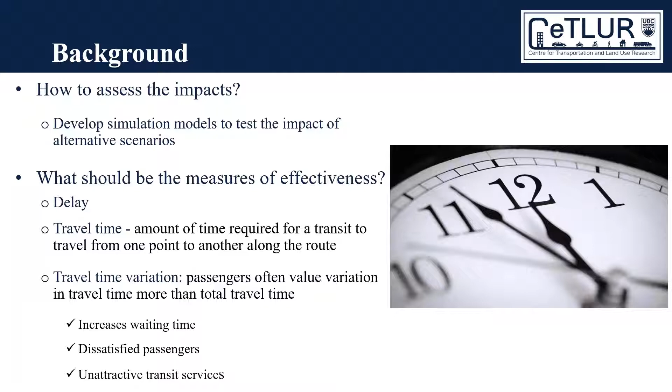For the study area, a busy congested corridor was chosen which runs through the city center in Kelowna, British Columbia, Canada. The corridor is Springfield Road, and the intersections range from the Gordon to Ziprick intersection. The length of the corridor is close to 5 kilometers.

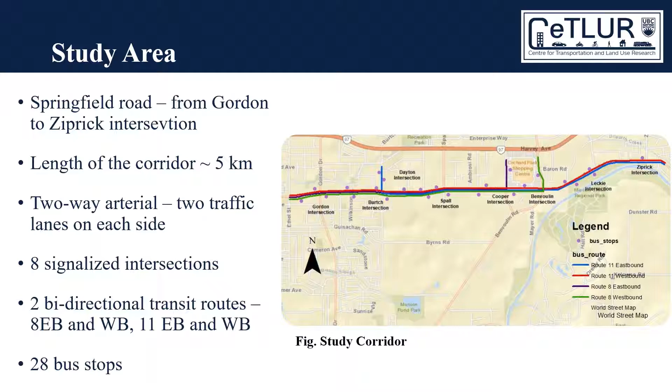This is a two-way arterial with 2 traffic lanes on each side. There are 8 vehicle-actuated signalized intersections, 2 bidirectional transit routes - number 8 eastbound and westbound, and number 11 eastbound and westbound - and there are 28 bus stops.

The network was coded using the VISSIM platform, version 11. The network coding involves the lane configuration, road grade, vehicle-actuated traffic signal timing, reduced speed areas, pedestrian crossing, transit routes, bus stop location, including the stop skipping probability at each stop for the transits, and passenger boarding and alighting.

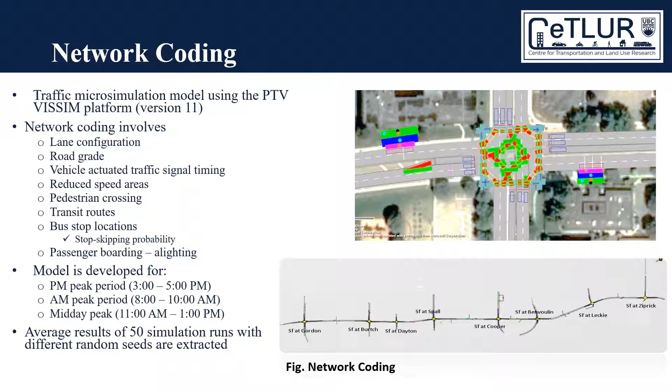All of the data were collected from the local government, City of Kelowna, and BC Transit. The model is developed for 3 peak periods: PM peak period 3 to 5 p.m., AM peak period 8 to 10, and midday 11 to 1 p.m. For each case, average results of 50 simulation runs with different random seeds are extracted.

The model is visually inspected and run. Every model was run over more than 100 times by differing the random seeds, with modified driving behavior parameters - Wiedemann 74 - the average standstill distance 2.1, additive part of safety distance 2 meters, and the multiple part of safety distance 1.8 meters.

After that, the models were also validated using real data collected from the field. The model was validated by queue-length and travel time of both car and transit. For queue-length validation, for example, we chose an intersection with 4 approaches.

Here, the values represent the simulated minus the field or observed, divided by the observed. We can see the error is close to 6 to 17%, which is reasonable.

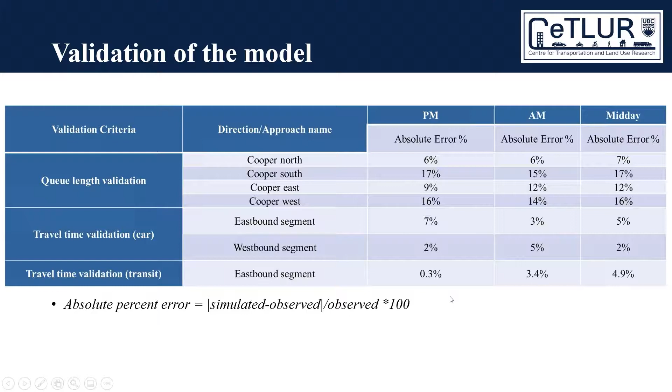4 scenarios were developed in the model. They are transit signal priority, queue-jump lane, exclusive transit lane, and a combination of transit signal priority and queue-jump lane.

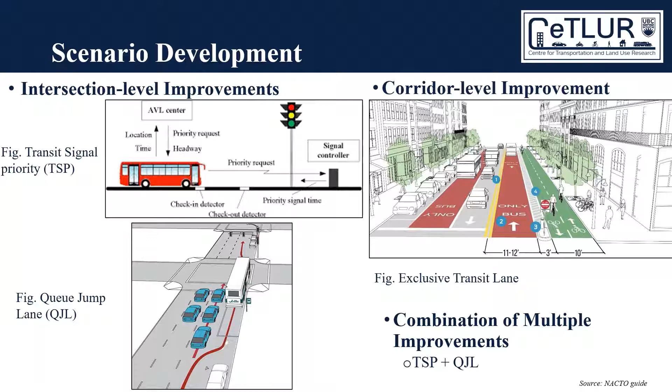Based on the travel time and delay results and visual inspection of the existing scenario, the new improvement scenarios were planned.

For example, transit signal priority was planned for the PM peak at the following intersection approaches: Cooper southbound approach, Burtch southbound and westbound approach, Gordon westbound approach. The reason behind this is we exhibit significant delay in these approaches, and others were also planned accordingly.

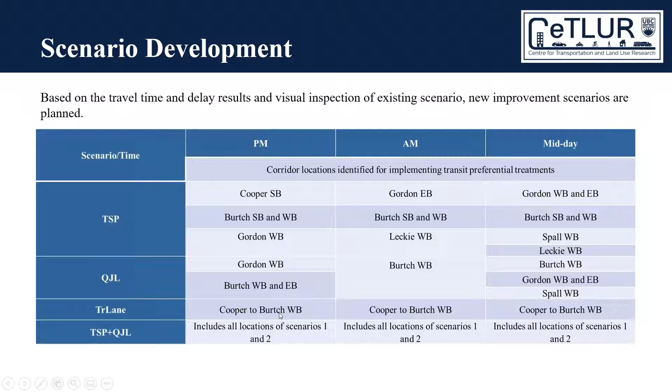After that, a random parameter regression model has been run. In order to capture the reliability or on-time performance of transit, model runtime and schedule runtime have been recorded in every segment between 2 consecutive bus stops in a given route.

From that, deviation between model runtime and schedule runtime has been recorded to address the on-time performance of transit. So here, reliability refers to the deviation of runtime between model and scheduled in a 2 consecutive bus stop segment.

All the remaining alternative transit preferential treatments showed a negative relationship, indicating an increase in reliability. However, except TSP plus QJL over the day and QJL during AM alternatives, all other treatments show heterogeneity by showing a higher standard deviation than the mean. With no heterogeneity, TSP plus QJL shows a significant negative relationship, implying it might cause consistent improvement in reliability over the day.

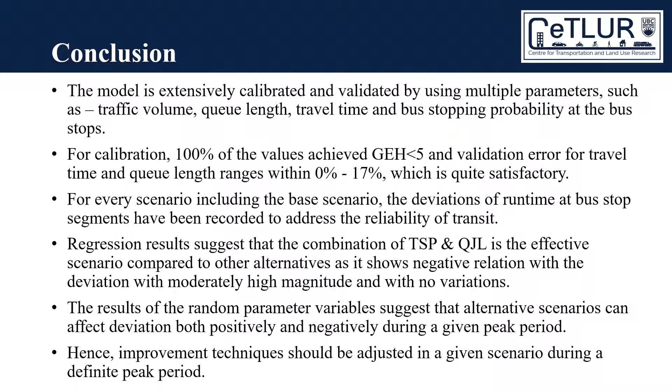Another important fact from the result of the random parameter regression model suggests that alternative scenarios can affect deviation both positively and negatively, and improvement techniques should be adjusted for a given scenario during a definite peak period.

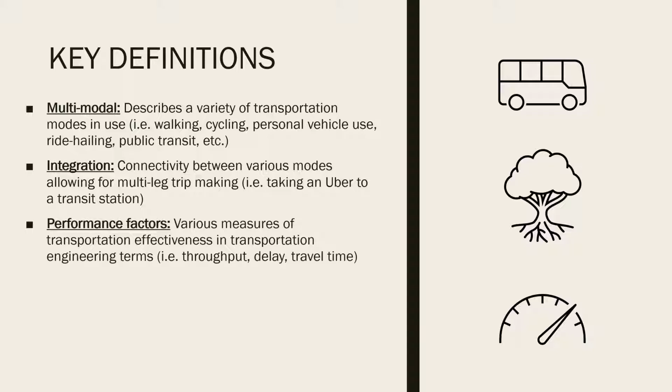Multimodal just means a variety of transportation modes: walking, cycling, personal vehicle use, ride hailing, public transit. Integration is the connection between these different modes, how we move from one mode to another in a mobility as a service system. Performance factors are how I will be measuring effectiveness in transportation engineering terms, such as throughput, delay, travel time.

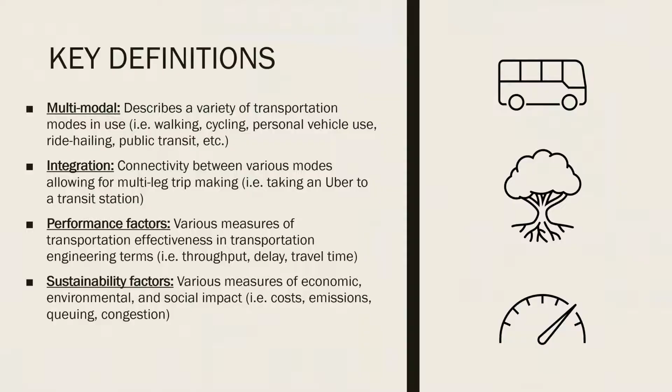We have many measures of economic, environmental, and social impacts. For this presentation, I'm going to be mainly focusing on the performance factors, since that was my main focus in using VISSIM. Here's another list of key concepts for MaaS.

It needs to be focused around the user—convenient, affordable, sustainable, multimodal. Information services are a big part in offering good mobility as a service systems, along with payment processing, and in a real world MaaS situation there would have to be a lot of public and private partnership.

So, problem statement: studies to date have not explored the hard performance measures of modally diverse networks in depth. There's still a lack of understanding as to how these various modes interact with each other and how they impact traffic performance.

I posited 3 research questions to achieve this objective. First, how is performance affected on a microscopic basis—these are effects observed by an individual person going through the network. Second, how is it affected on a network-wide basis—how does this affect the network as a whole? And third, how do these modes interact in terms of performance effects? That comes more into statistical modeling.

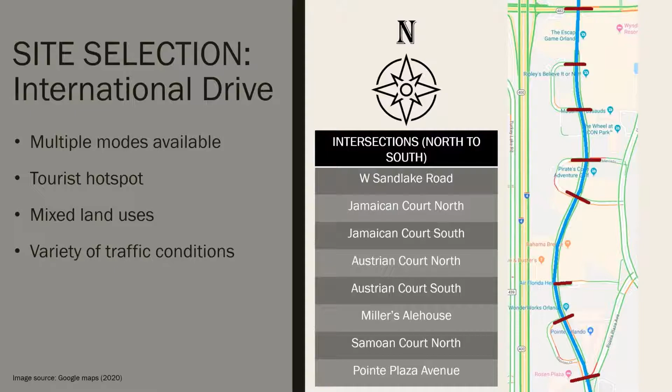The modeling stages went as such: starting with data collection, then geometry, signalization, vehicle compositions, vehicle inputs, driver behavior, transit inputs, pedestrian geometry, pedestrian signalization, and finally calibration.

I didn't want to go too in depth on the calibration process, but basically it was calibrated based on flow rates, queues, travel times, and general observations to make sure these matched up with real life. This was typically done by calibrating them to within a certain percentage of the real life observed values, and also through the Geoffrey E. Havers statistic, the GEH statistic, as mentioned in the previous presentation.

I'm going to go through my modal variables and how I selected these levels. First, demand. Demand represented the overall flow rate through all modes through the network. This was a combination of all the data, including demand in persons per hour for all modes, because when we compare performance effects, we need to compare apples to apples.

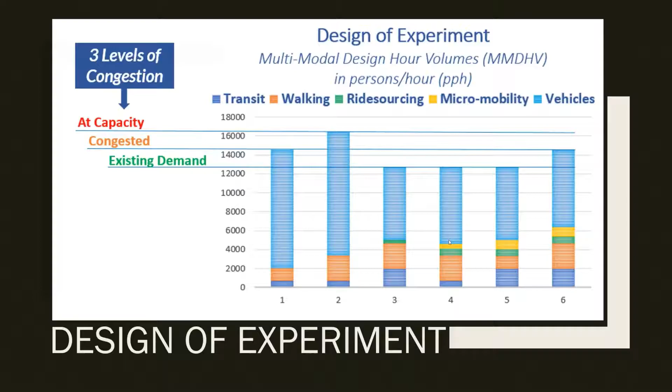Vehicular travel time, statistical modeling. The modeling process started off with data extraction from VISSIM from the calibrated model, organized into a data table, filtering of outliers via standard deviations, residual plots, and studentized residual distributions, stepwise regression and AICC comparisons to choose which models fit the best. I tried a couple alternative model types: linear regression, generalized linear, data transformed regressions. Finally, I picked the final model selection using statistical diagnostics such as ANOVA, lack of fit, and coefficient t-testing.

So what this translates to in plain English: micromobility reduces travel time, and higher levels of walking slightly increases it. Notably, the walking-micromobility interaction suggests that higher micromobility volumes add to walking delay. This is likely due to conflicts between pedestrians and cyclists. In how I modeled my network, pedestrians and cyclists were able to share the sidewalk and conflict and interact with each other as they would in real life.

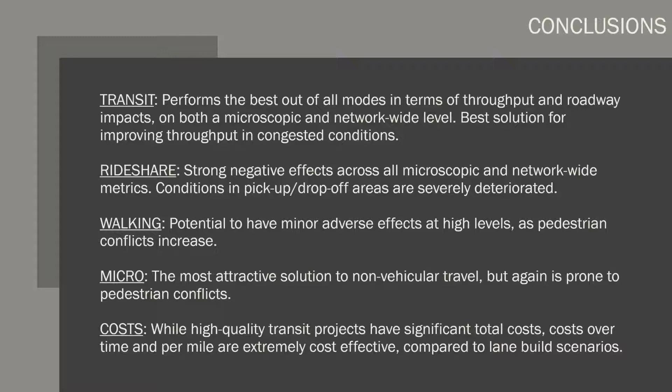Costs over time and per mile are extremely cost effective compared to lane build scenarios.

So I'm just going to finish this off with implications and future directions. Transportation design has recently been too tunneled on prioritizing vehicles, but the bottom line has always been moving people. The research demonstrated major insights towards more cost and performance efficient movement of people in terms of modal focus, design

considerations, and return on investment. The shift towards multimodalism cannot happen if lanes are being constantly expanded. We really need to focus more on designing around other modes, like with the laybys. We need to focus on preventing conflicts between pedestrians and cyclists, etc.

Networks need to be transit-oriented along congested corridors. This supports both the literature review and the performance results shown in this research.

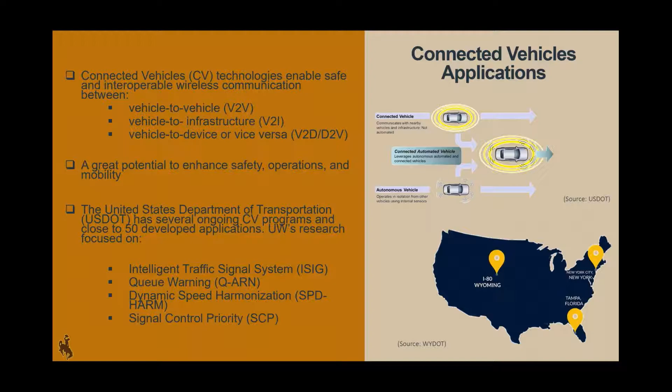Our research is focused on four applications: intelligent traffic signal systems, queue warning, dynamic speed harmonization, and signal control priority. This particular study is focused on signal control priority, usually known as transit signal priority.

It is a tool that makes the transit system more reliable using an operational strategy to aid the movement of transit vehicles or freight vehicles through signalized intersections.

It can be implemented as passive, active, and adaptive. Passive priority is based on already saved data of transit routes and ridership patterns, and it does not require any kind of detection. On the other side, the active and adaptive priority depends on detection and information exchanged between transit vehicles and traffic controllers.

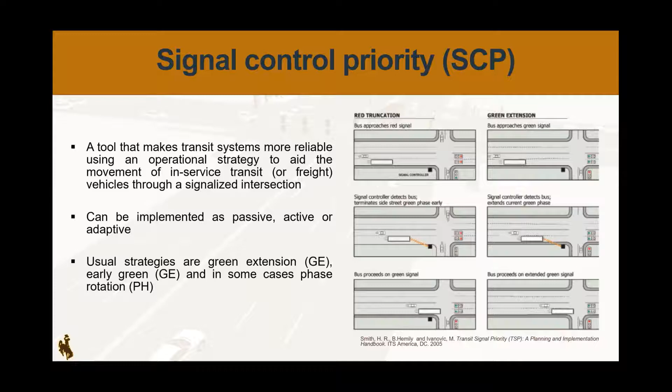Once signal control priority, or TSP, is granted, different strategies can be applied like green extension, early green, and in some cases phase rotation.

Functionality of this application directly depends on the communication between transit vehicles and traffic controllers. So far, this communication was achieved through traditional detectors or later through a global positioning system. Even though these systems ensure the call of TSP, they show some kind of imperfections, which can be solved with CV technology because it can ensure transmission of accurate and very detailed information 10 times per second.

So signal control priority in a CV environment needs three components: a roadside unit installed on the traffic controller to be able to receive and broadcast messages, onboard equipment installed on the vehicles so these vehicles are able to communicate with each other and with the traffic controller, and information exchanged between these two, usually known as a basic safety message.

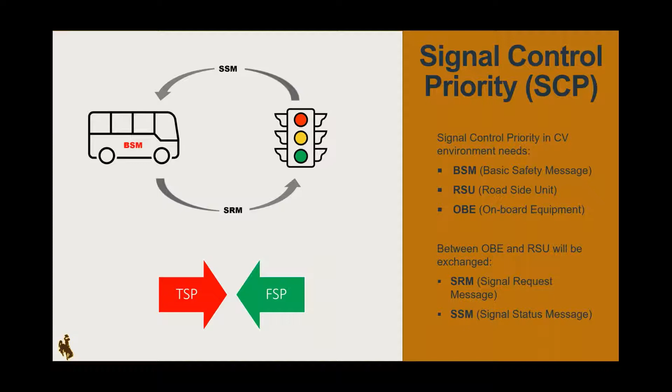The content of the basic safety message can differ for various applications, but in the case of signal control priority, the vehicle sends a signal request message while the controller answers with a signal status message. The same approach can be applied to freight vehicles, known as freight signal priority, or other solutions for transit like BRT.

The test case of this study is a multimodal corridor of 10 signalized intersections in Salt Lake City, Utah. Testing was performed for the afternoon peak hour from 4 to 6 p.m. It's important to mention that this corridor is served by a major bus route, Route 200, and future plans from the city include center running BRT for this corridor.

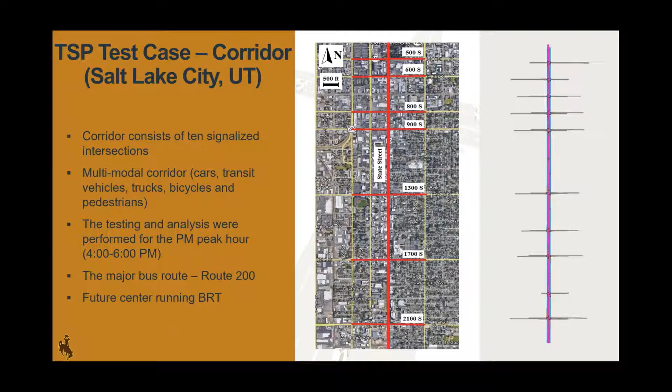The entire modeling as well as output evaluation were performed through VISSIM microsimulation coupled with ASC3 software in the loop controllers. The communication among vehicles and infrastructure, which includes sending a basic safety message to roadside units, was coded using Python programming language and embedded in the microsimulation, while signal control operations, priority, and controller logics were programmed directly in the controllers.

Here are some important settings that we did before finishing our models. It's important to change user-defined attributes that allow the model to convert VISSIM coordinates into world coordinates, meaning a vehicle with onboard equipment sends actual latitude and longitude coordinates directly to the controller.

Another setting is related to the external controller. Signal control priority logics are programmed directly in the controller. Since we had 10 intersections, it was necessary to do these settings for each of them. What's interesting is that the same settings done in simulation can be performed in the field.

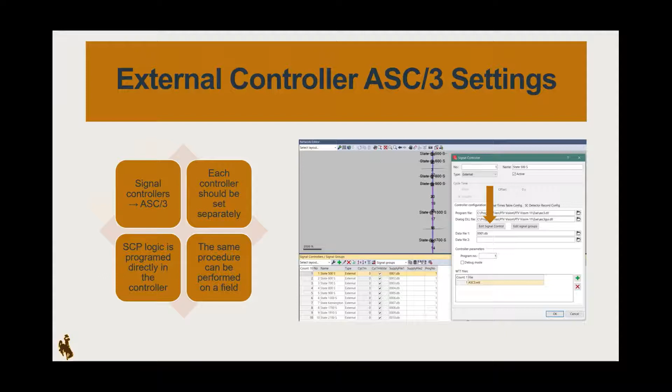The basic safety message exchange between onboard equipment and roadside units is coded in Python programming language, supported by functions from VISSIM's COM. In order to perform communication, as a first step it is necessary to define the detection range and what type of vehicles is eligible to transmit the information.

CV technology gives us flexibility to use any kind of vehicle attributes, such as speed, vehicle type, coordinates, or traffic condition, to define a detection range, which is completely different from the traditional detectors used earlier.

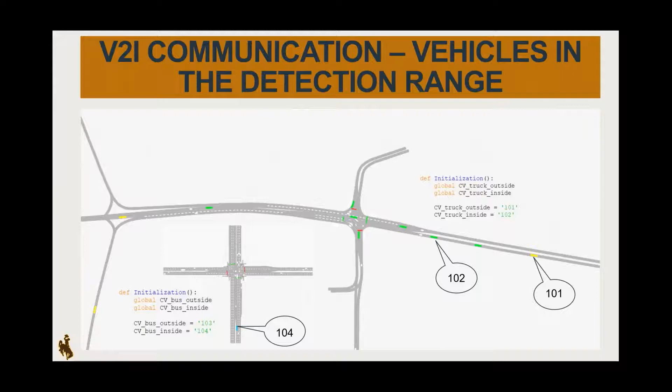The basic safety message contains the position of the vehicle besides other information. Distance is computed using a haversine formula, so the controller is updated with the vehicle position at each time step. Based on distance computation and the actual speed of the vehicle, the script was able to calculate the exact arrival time of the vehicle at each time step, which is transmitted to the roadside unit.

We applied two algorithms in our models. The first algorithm is for regular buses in a CV environment, and the second algorithm is applied only for CV-equipped buses. It checks the distance between a vehicle and the controller, the estimated arrival time of the vehicle to the intersection, and the traffic conditions, actually queue conditions in front of the vehicle.

Actually, COM functions give us options to make choices about the criteria that we want to include in our algorithm.

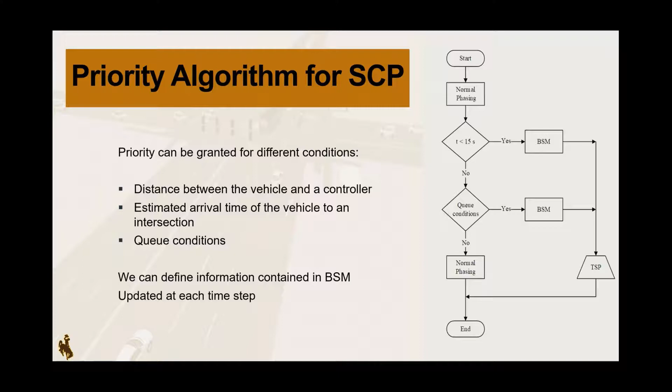Another algorithm, applied for the future running BRT, checks three different criteria and decides whether a bus needs TSP, and if yes, which level of priority. Inputs for the algorithm are the time the bus needs to reach an intersection, the number of passengers on board the bus, and whether the bus is behind schedule or not.

The threshold for bus occupancy was 20% of the vehicle occupancy, which is about 22 passengers on board. The lateness is computed according to dwell times in both directions and the free flow speed of the transit vehicles.

The roadside unit receives a basic safety message, and if any of the conditions are fulfilled, the controller will receive the transit signal priority request. The location from which a bus requests TSP depends on the speed and distance from the intersection. When a bus leaves the intersection, the priority request is terminated.

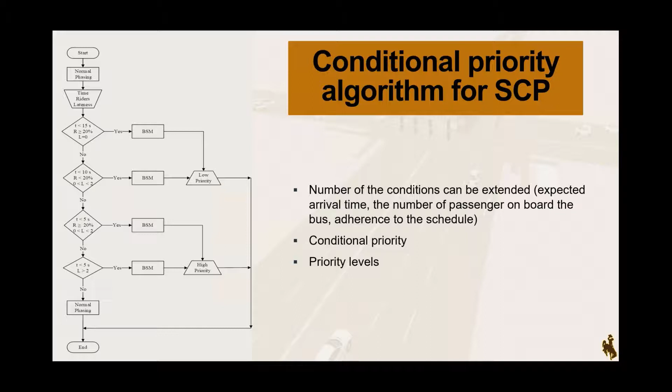Since we have different levels of priority, we have different strategies applied. If it's no priority, no strategy is applied. If it's low priority, green extensions and earlier green will be applied. In case of high priority, it will additionally be aided with phase rotation.

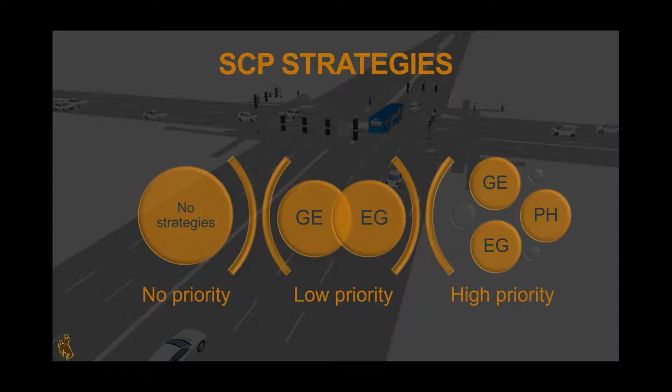Here we have a small video where we can see a vehicle which is out of range, shown in pink, and a couple seconds later it changes to blue color, meaning it's entering the detection range. On this controller app, we can see that it's granted transit signal priority, meaning it fulfilled all the conditions that the algorithm proposed.

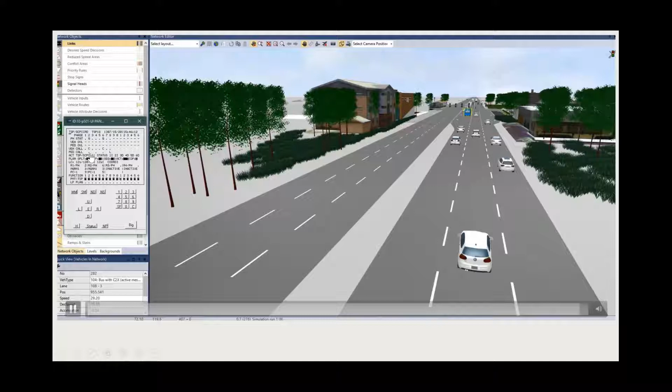Implementation of CV technologies in the TSP strategies would reduce delays. In our study, it showed that it's up to 33%, and it also increased speed of the CV equipped vehicles, up to 11%.

As expected, TSP has some negative effects on the traffic from the side streets. In this case, it is up to 7%, but it is still less than for conventional transit signal priority.

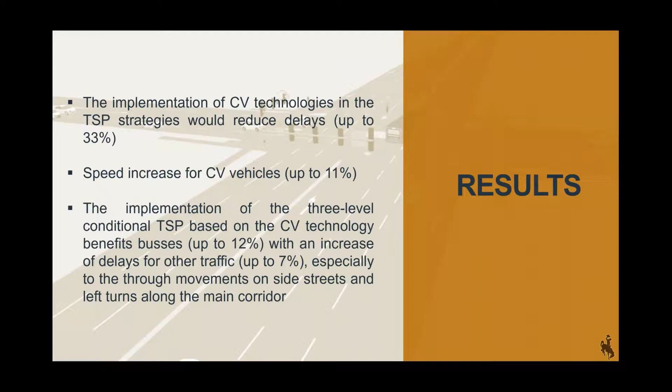So some brief conclusion: the information from CV equipped vehicles can be used to create different forms of conditional priority. Basic safety messages used in algorithms contain current queue conditions, vehicle speed, the distance between transit vehicles and intersections, the number of passengers on board, expected arrival time of the vehicle, and schedule adherence.

The algorithm is capable of introducing different levels of TSP while considering several criteria to grant the priority. Green extensions, early green, and phase rotations were strategies implemented in our models for different combinations.

Generally, from the 6 models or scenarios that we had, models where TSP strategy was coupled with CV technology showed a lot better performance. My name is Jahed.

I'm doing my PhD in civil engineering at Dalhousie University in Halifax, and I'm finishing it soon. Today I'll present on the development of a pedestrian microsimulation model accounting for social distancing strategy.

We did this work and submitted a paper on it to TRB, and we're waiting for the decision.

We've been in a pandemic for a year. We know there have been other pandemics in human history before, but this one is novel and catastrophic.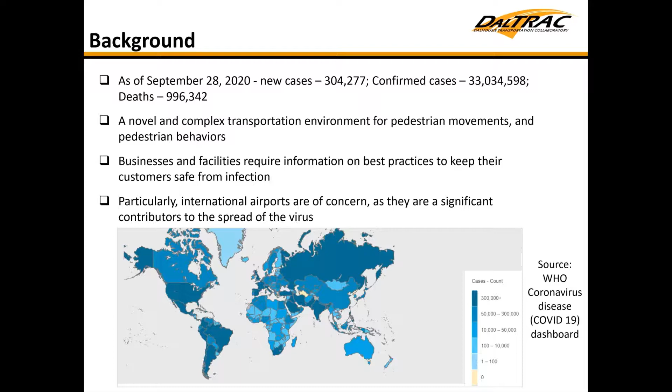Particularly, international airports are of concern because they are significant contributors to the spread of the virus. We have to keep in mind that there is already a shift in pedestrian behavior from a business-as-usual condition to pandemic conditions, so airport authorities should be, or probably are being, proactive in implementing strategies to keep pedestrians safe from infection.

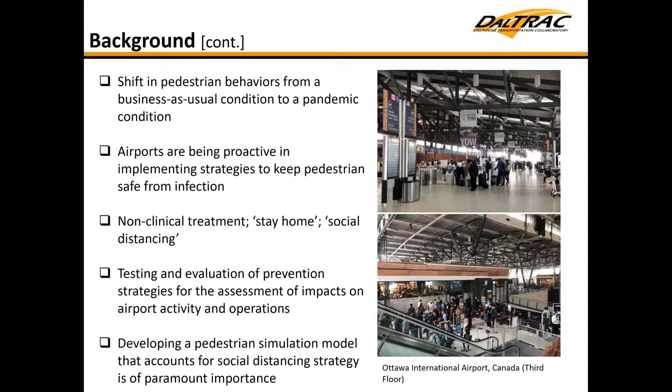But we need to evaluate and test those strategies before commencing, to assess the impacts on airport activity and operations. That's what motivated my study, which led to developing a pedestrian microsimulation model that accounts for social distancing strategy.

So my study develops a pedestrian microsimulation model that accounts for social distancing strategy for an international airport in Ottawa.

I used PTV VISSIM 11 and its add-on VisWalk to develop the model, and I utilized different commands within VisWalk to develop the model.

For example, you can use the area command in VisWalk to define the floor space, and there are other commands like obstacles to replicate kiosks and other places where pedestrians cannot move. Those kinds of obstacles you can define within the model.

And there is a direct command for escalators and stairs to include those within the simulation model. We chose the Ottawa International Airport third floor because that floor is directly connected to ground transportation, and there is high traffic activity on this floor due to arrival and departure activity.

To facilitate pedestrian movement within the simulation model, I used partial routing and static routing. Partial routing facilitates stopping at intermediate places between a pair of origin and destination, for example, waiting in...

...a spot like in front of the service counter for service in the airport. So you need to use partial routing to make a pedestrian wait in that area. And static routing basically defines the origin and destination.

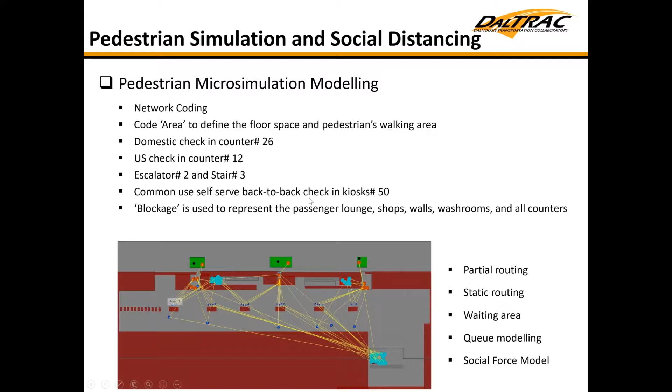So the social force model has several parameters to replicate pedestrian movement, like the X-Y directions, relaxation time, inertia, and responses to different events. You can model all those pedestrian behaviors using the parameters of the social force model.

I'm not going through all the parameters one by one, but I can discuss the parameters in detail later. Please feel free to contact me.

Now, the most challenging part is the calibration of the simulation model. As we will be using this simulation model for social distancing scenario analysis, we have to calibrate the parameter values of the social force model so that we can create a social distancing environment within the simulation model. I followed 3 steps to do the calibration: visual observation, sensitivity analysis, and parameter combinations.

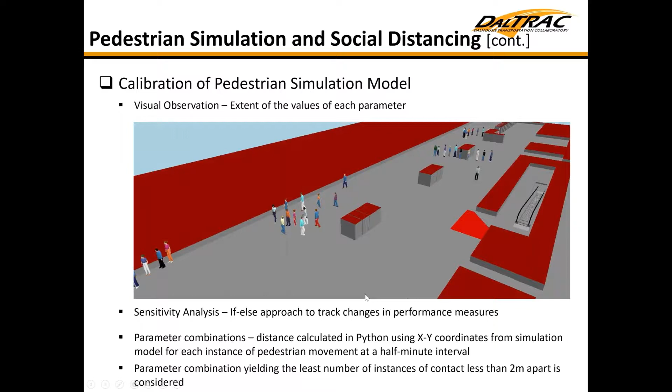Now, how to choose the right parameter values for the social distancing scenario analysis within the simulation model. We know that social distancing basically means keeping apart at 2 meters or greater, per the social distancing directives. The combination of parameters that will yield the minimum number of pedestrian movement instances where pedestrians come closer than 2 meters, we'll take that combination because we want fewer instances of pedestrian contact closer than 2 meters. That will be our target combination for scenario analysis.

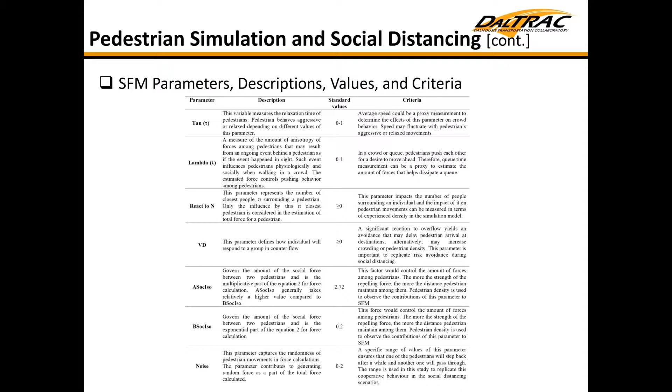This table basically shows all the social force model parameters, their descriptions, and the criteria I used to evaluate these parameters and their values. You can take a look at these. I'm not going in detail through this table, but here are the results of the calibration.

Three parameters, VD, A socio-iso, and B socio-iso, govern the forces between pedestrians based on the distance between pedestrians. As we are talking about social distancing, and distance is really a crucial factor for social distancing, these three parameters are the main influential factors to create a social distancing environment within the simulation model.

I also showed some results from the sensitivity analysis for these three parameters. You can see if we increase the values of these three parameters, pedestrian density decreases, and that's what we want, because at a lower density, people will be apart at a higher distance, at least 2 meters or greater.

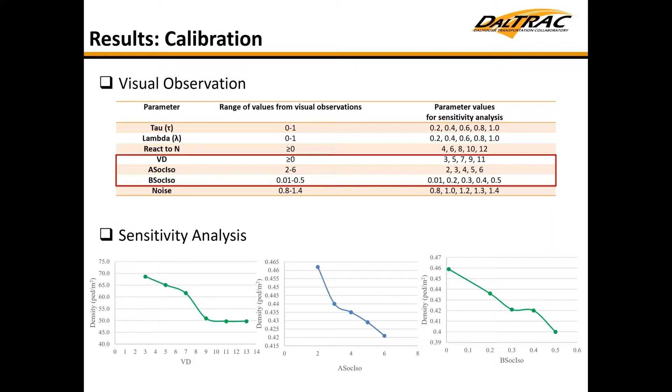After the visual observation and sensitivity analysis, we now have the values of the parameters that give realistic pedestrian behavior. Keeping all other parameters constant, I only varied these three main parameters to create combinations of parameter values, and I ended up with 29 combinations of the social force model parameters. I ran a simulation for each combination 3 times, giving us 87 simulation runs. And for the sensitivity analysis and visual observation, I ran 210 simulations to identify the appropriate parameter values.

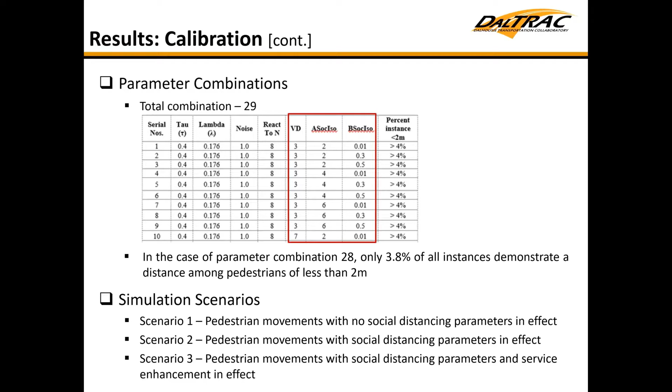Let's take a look at the results. For scenario 1, there were 10,312 instances of pedestrian movement demonstrating pedestrian contact less than 2 meters. When we applied the social distancing parameter values obtained by visual observation, sensitivity analysis, and parameter combination, that significantly decreased the number of instances—by 92% and 93% in scenario 2 and scenario 3 respectively, with respect to the base case.

Now for the travel time analysis, scenario 1 has lower individual travel time. For scenario 2, when the social distancing directive is in effect, travel time increases due to queuing in the airport. But when we double the staff at the service counter, though the social distancing directive is still in effect, travel time improves.

These are more origin-destination travel time analyses for the Ottawa International Airport. When the social distancing directive is in effect, we see similar results: scenario 2 offers higher travel time with respect to scenario 1, where there was no social distancing directive. But scenario 3 gives better performance because of the social distancing directive combined with service enhancement, like doubling the staff at the service counter.